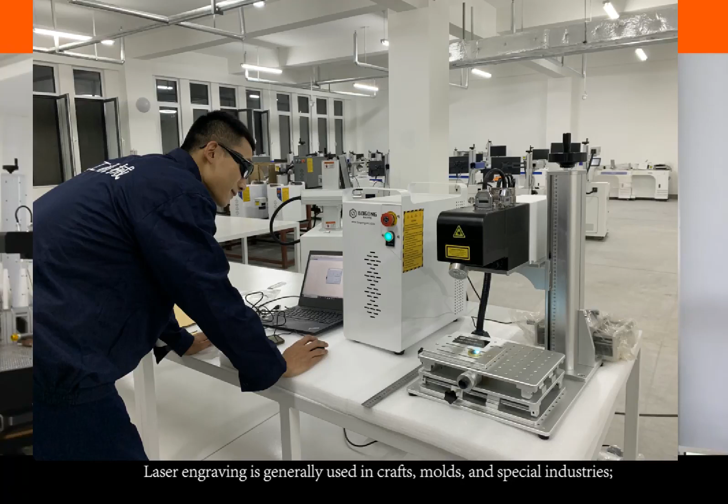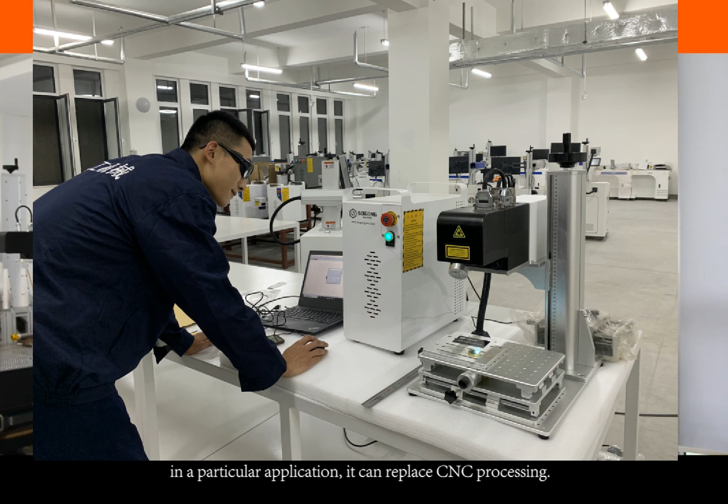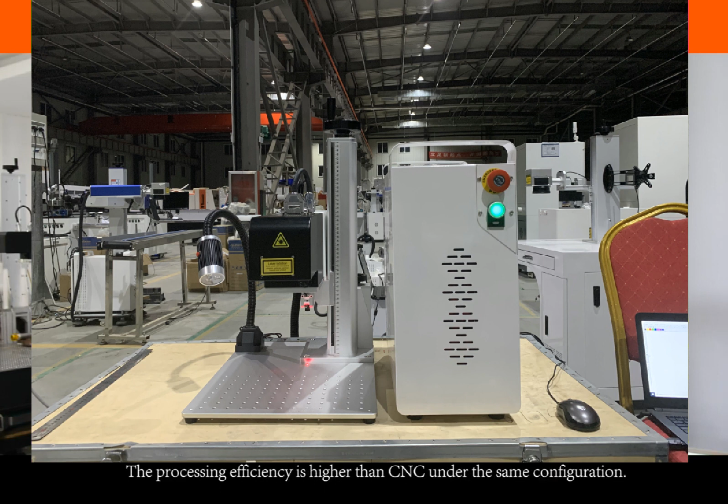Laser engraving is generally used in craft, molds, and special industries. In a particular application, it can replace CNC processing. Laser engraving could achieve more precise processing of images. The processing efficiency is higher than CNC with the same configuration.

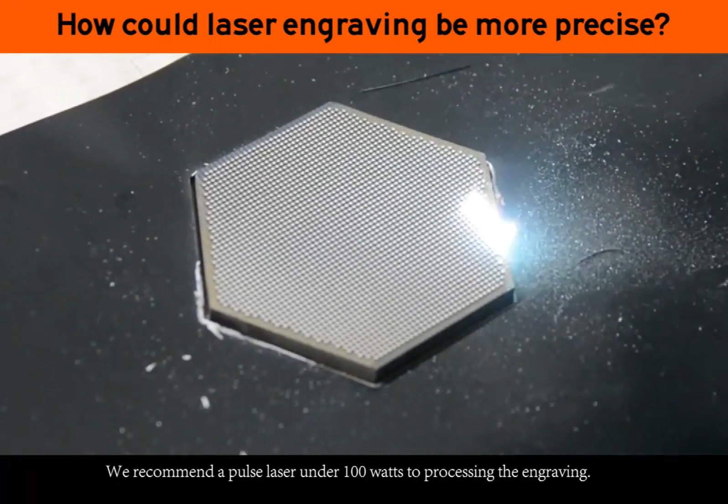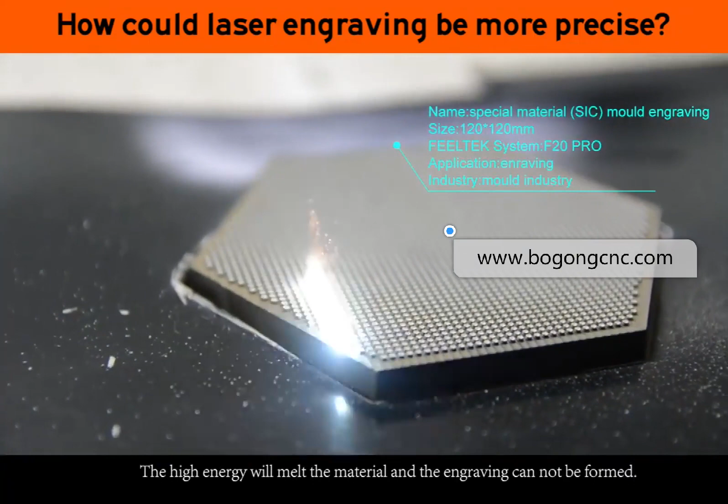Today, let's talk about how laser engraving could be more precise. We recommend a pulse laser under 100 watts for processing the engraving. Although higher power could improve the efficiency, the higher energy will melt material and the engraving cannot be formed.

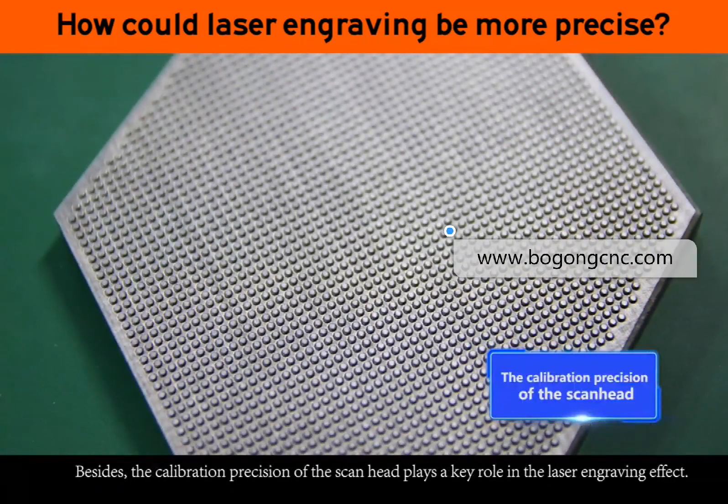Besides, the calibration precision of the scan head plays a key role in the laser engraving effect. The procedure of laser engraving is sizing, setting laser thickness, and then adding clean at the final step.

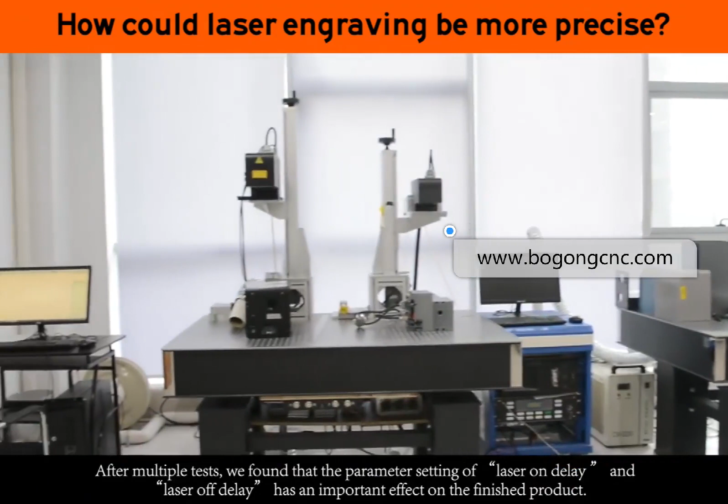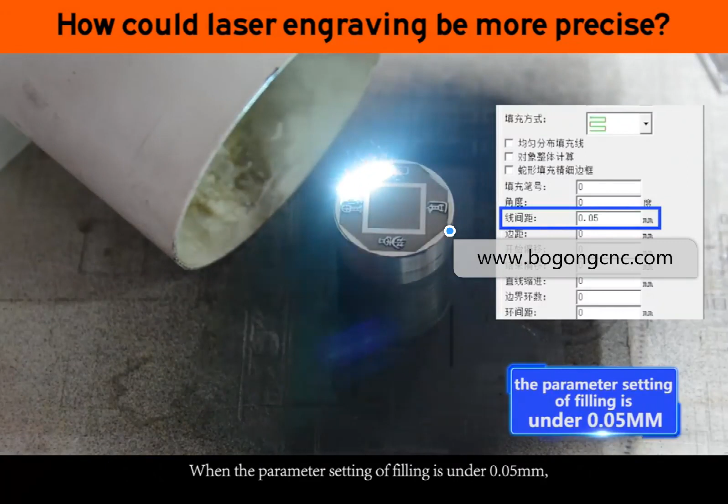After multiple tests, we found that the parameter setting of the laser on delay and laser off delay has an important effect on the finished product. When the parameter setting of filling is under 0.05 mm, the engraved image could be more precise.

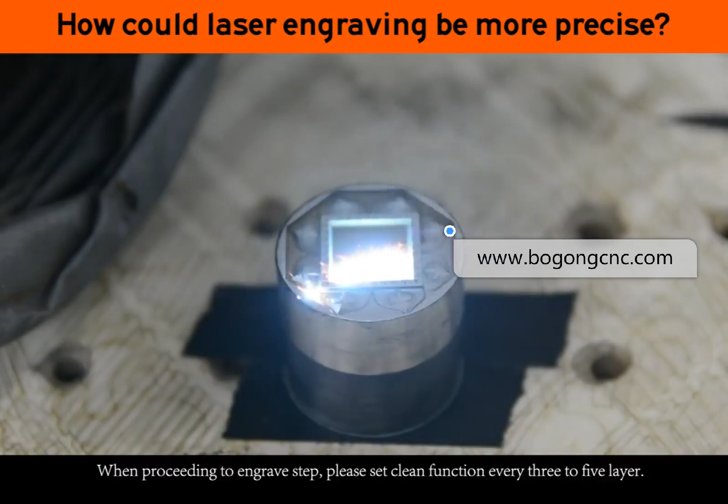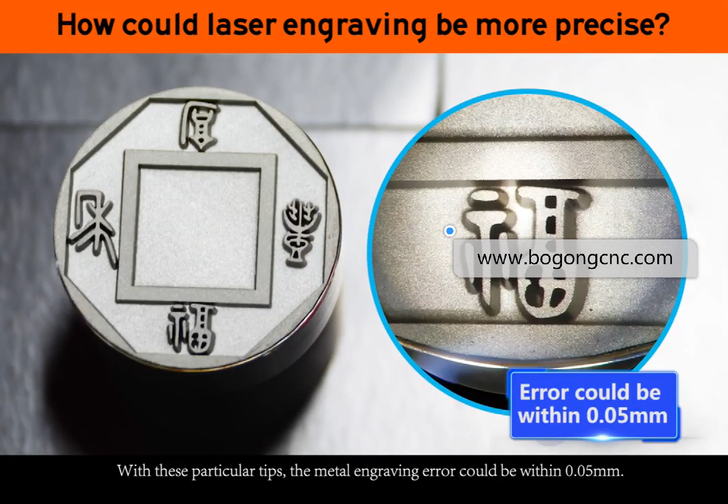When proceeding to the engrave step, please set the clean function every 3 to 5 layers. With these particular tips, the metal engraving errors could be within 0.05 mm.

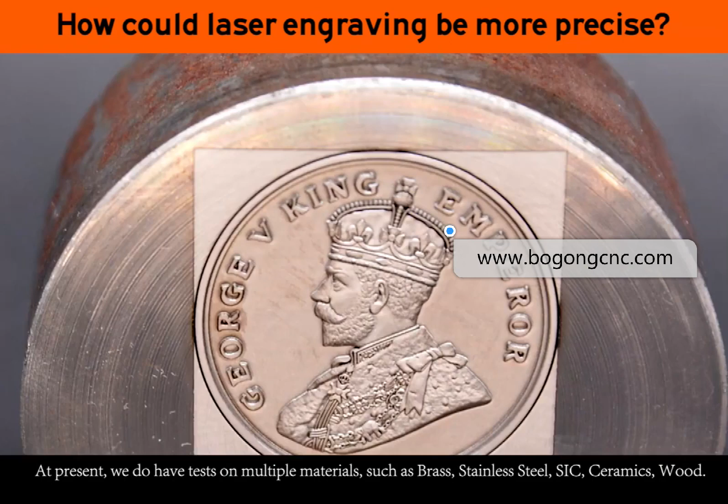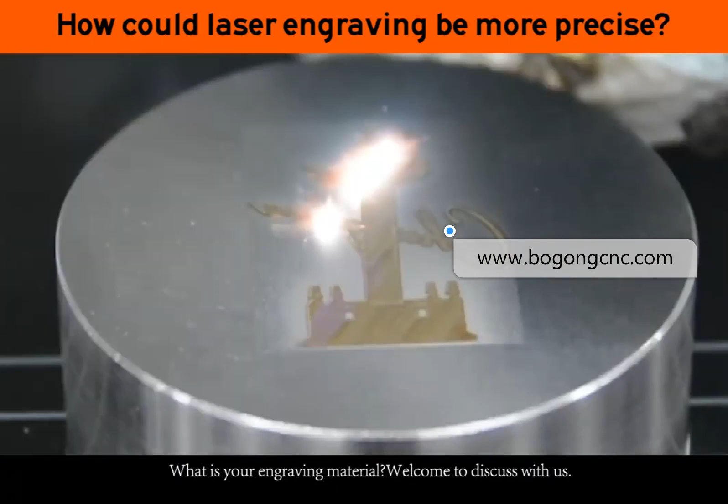At present, we have tested multiple materials such as brass, stainless steel, SIC, ceramics, and wood. Different materials come with their corresponding processing parameters.